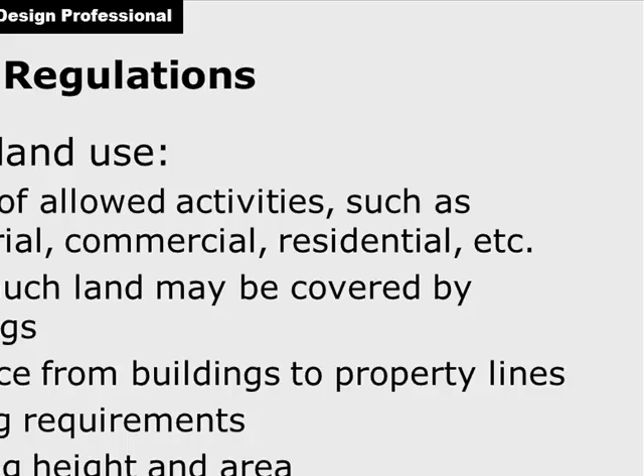So that's what zoning regulations are. They'll also tell you how far you have to be from the building, etc., from the street line. You have to have right-of-ways, because usually within like 10 or 15 feet of the curb, there's utilities running underground, or it may be in the back, like in an alleyway, and you can't build on top of those, or else if something happens, they can't get to them to fix it.

Building codes are what regulate the design of the building itself. You have to deal with fire safety, emergency egress, construction quality, structural integrity, durability, and livability. All of that is within the building code, and I don't know if we have one here. We need to get one if we don't have one. But in Corpus, we use the IBC 2009 version.

I don't see one here. I have one at home, so I'll probably bring it up here, but until we can buy one - basically, it's about that thick, and it's lovely reading. But it's divided up into sections, and I think there's some sections in the slides that you may have seen, and we're going to do a little exercise on it, so you can understand how to look through things.

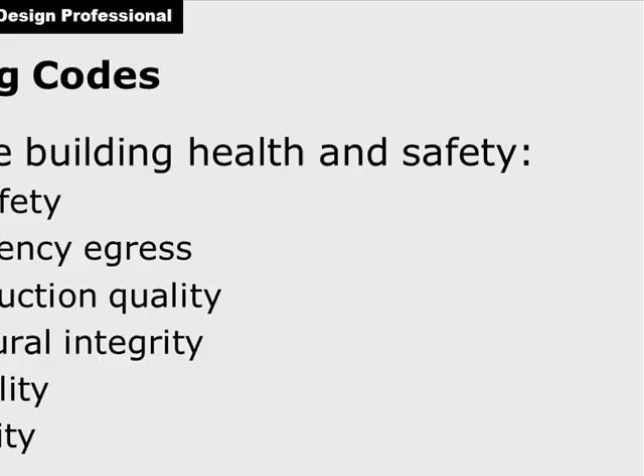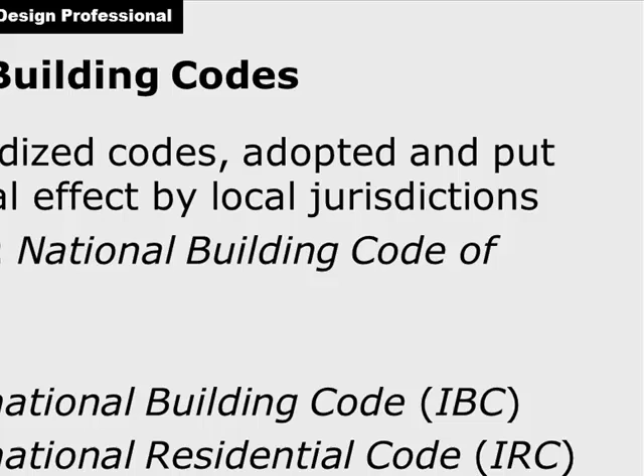More issues that the building code covers. It talks about the IBC, that's what we use here, and the IRC. They're all made by the same people. They have a monopoly.

One thing you need to know, basic information on your building, is the activity within it. A is for assembly. This building has a lot of assembly spaces. It's not educational because it's higher education - it would be educational if it was 12th grade and under, but it's just an assembly building because we're mostly adults and we just assemble.

Business, obviously, is business building. This building also has part business in it. Factory is obvious. High hazard would be some place where they store flammables or they work with flammables. A welding plant is probably a high hazard thing. You have to build accordingly.

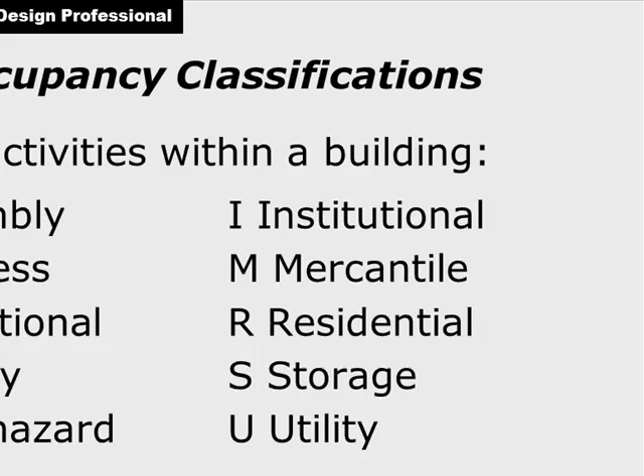Institutional is jails or mental hospitals or stuff like that. Mercantile is stores, residential storage, and utility. So those are the different buildings, and it talks a little bit about those. You can read that on your own.

Then you get into construction types, which you have to choose, and that is based on the size of the building, whether you're going to have sprinklers in it. Sprinklers let you have a bigger building because it's all about getting out in case of a fire. And if the sprinklers start, then you have a longer time to get out, so you can have a bigger building.

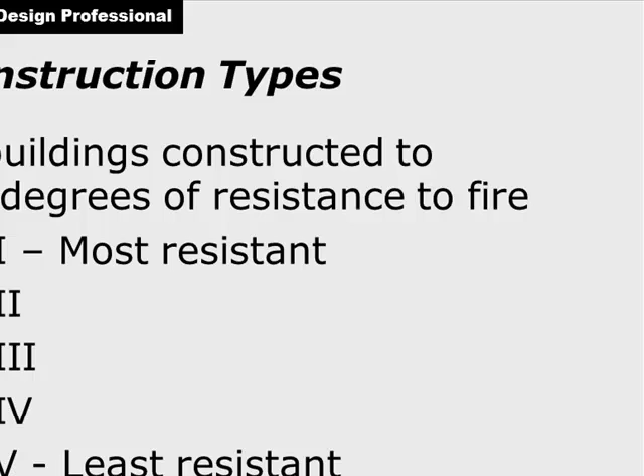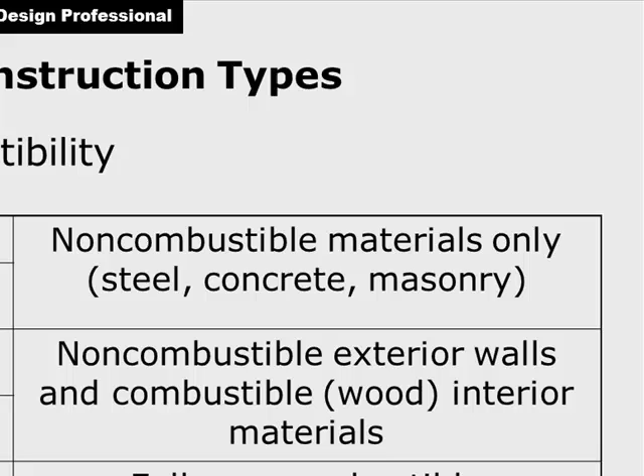Most resistant to fire is type 1, least resistant is type 5. Most commercial type buildings are type 2 construction, which is like steel studs and gypsum wallboard, I believe - non-combustible materials, steel, concrete, masonry. Type 3 might have wood 2x4 studs in your partitions. Type 5 is fully combustible.

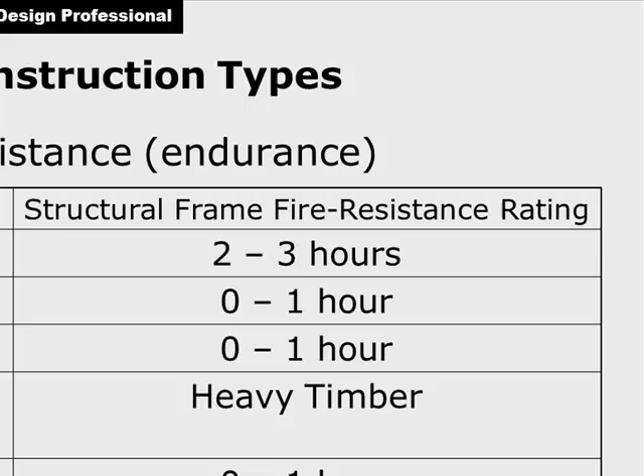And that's how long the frame resistance lasts. Type 1 has to stay standing for 2 to 3 hours, has to give you 2 to 3 hours before the whole thing's collapsed. Type 2, you got 1 hour, but with sprinklers it would be longer. Type 3 is 0 to 1 hours. Type 4 is heavy timber, which is fire resistant - we'll learn about that later. Type 5 is 0 to 1 hour.

Here's some of the, talks about the different fire resistance. You can study that, and I think we might have to look at it when we do our exercise.

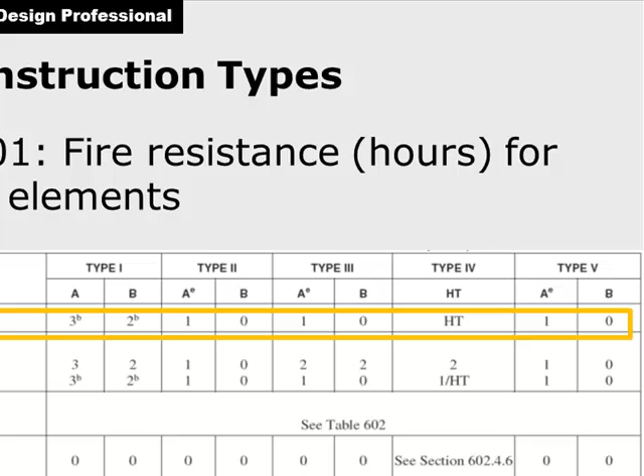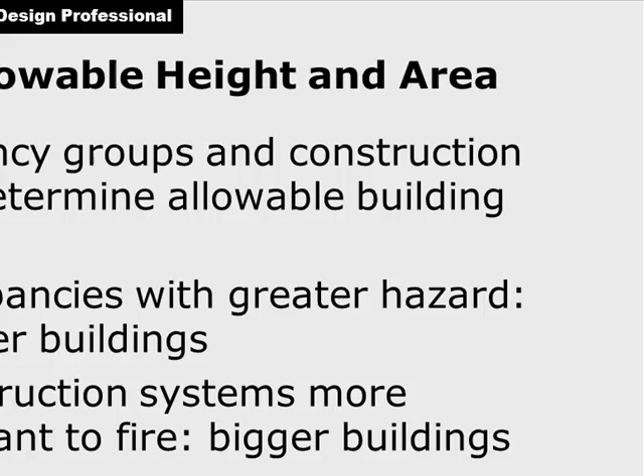Based on your usage of the building is how high it can be and how big it can be. And it varies - if you're going to spend the money to put sprinklers in your building, you can have a taller, bigger building.

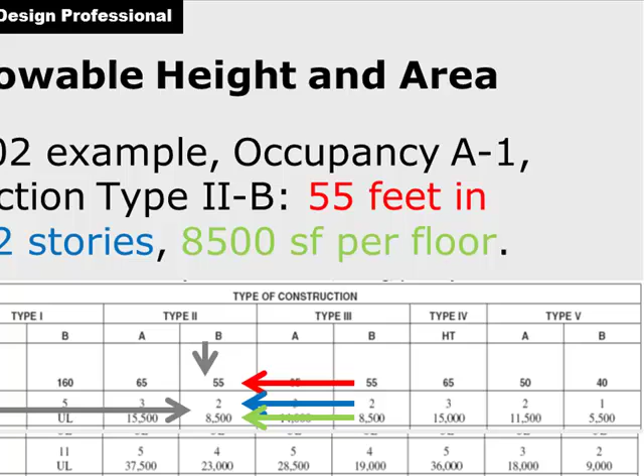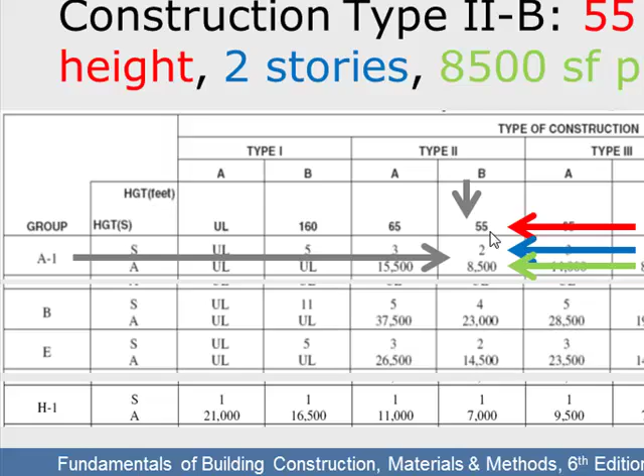What they're saying here is a type A1, assembly 1, construction type 2B can be 55 feet tall. There's the type 2B, and it's in the A1 group, so it can be 55 feet tall. It can be 2 stories, no more than 2 stories tall, and it can have 8,500 square feet per floor. So that's a common table that we use a lot.

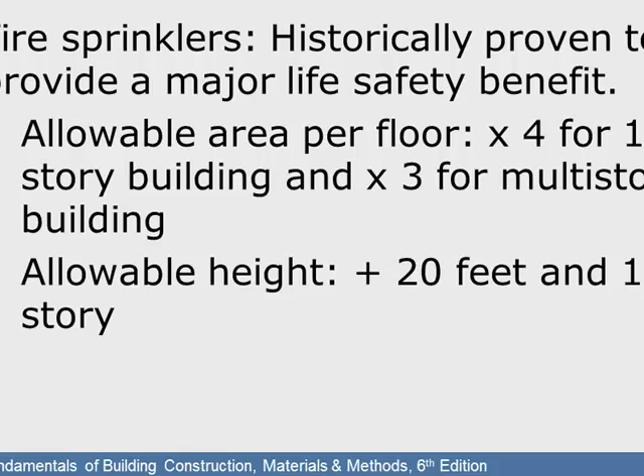We talk about specifications, or specs for short, a lot. Did I tell this class about how thick specs are? I forget. Well, basically, specifications are like the Bible that go with your drawings. They're a legal document issued by the architects and engineers, and they cover everything in written format as required.

So there'll be a specification on gypsum wallboard, and it'll say it has to be 5/8 inch thick type X because that's fire resistive, and it can only be made by these manufacturers. So the contractor looks that up, and then he knows he can only go to these places to get his gypsum wallboard. And there'll be specifications for these countertops.

And all of this is divided into sections, and I think it shows that. Yep, right there. So you've got all these divisions, and within that you have all the different elements of your building. Division 0 is the legal documents, contracts, and how they're going to go about bidding and stuff like that. General requirements is stuff that happens at every construction site. You know, they have to have an office, they have to have their own porta potty, they have to fence off the area, stuff like that.

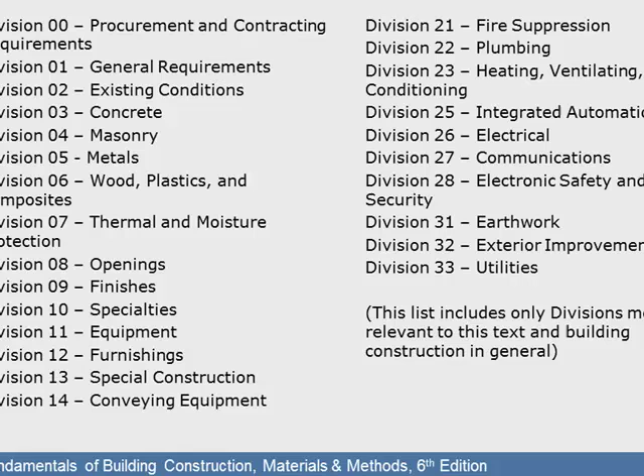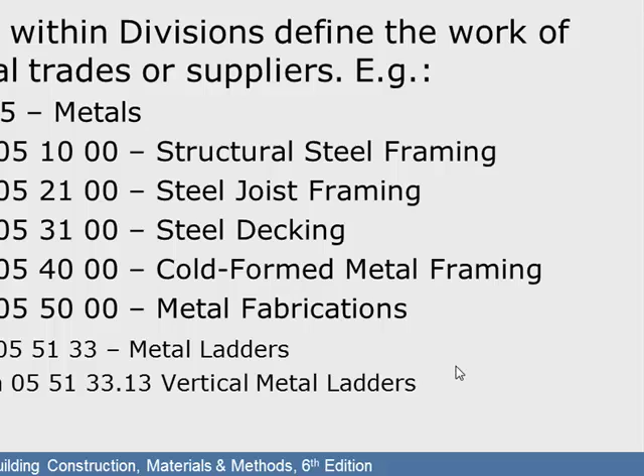Okay, and then the divisions are further broken down like this. You have Division 5, which is metals. Part 10 of that would be steel framing. Part 21 would be steel joist framing, and so forth. There's a zillion of those, but that just keeps it organized. And they even have programs now where it builds it for you and makes all that legal mumbo jumbo.

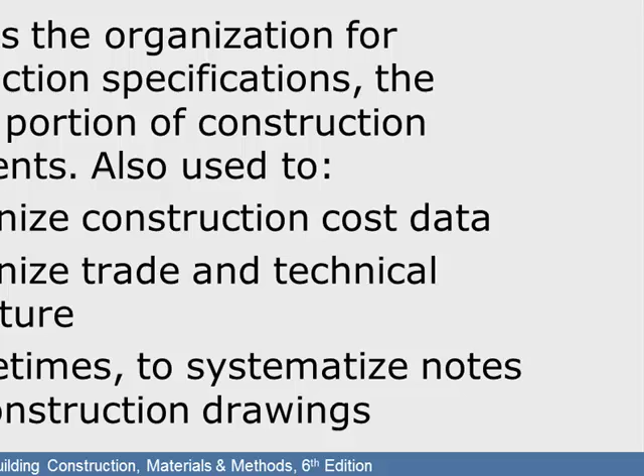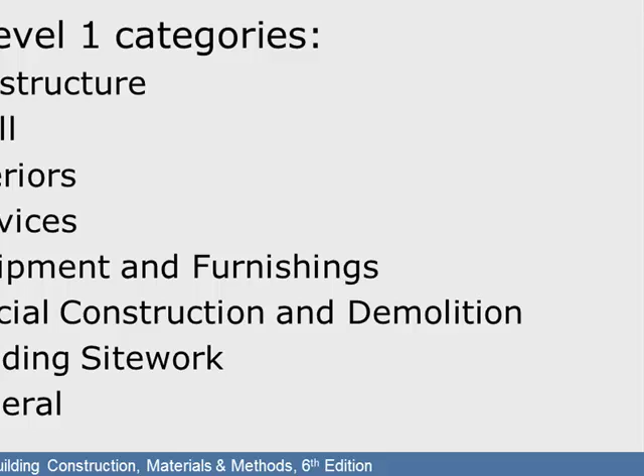There's other ways to do it, but the most common way is the CSI format. That's what most architects in the United States use.

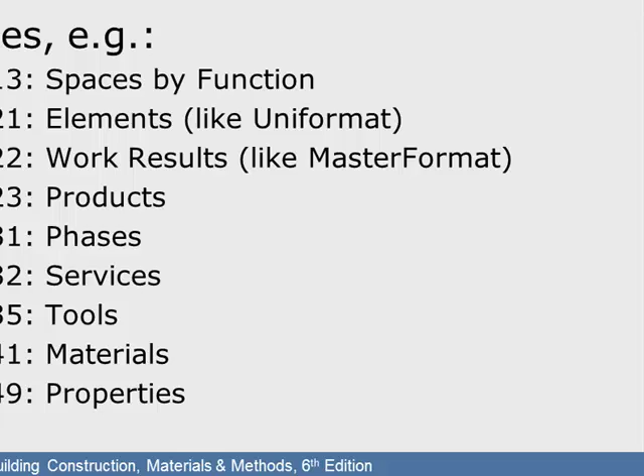So the contractor is the construction professional. He's the one that builds it, obviously. The design team usually consists of architects, engineers, and other consultants. The construction team is the general contractor and his subcontractors and suppliers. The general contractor is kind of like the architect of the design team. He organizes and hires subcontractors because you can't possibly keep all the specialties you need on staff. You can't have an electrician, a plumber, a concrete pourer, a framer, and all those people. Sometimes if they do a lot of a certain thing, they may have someone like that, but in general they have to sub it out.

But they have ones they usually use and they're very familiar with. And then you got the owner who finances it and has a lot to say about it. So there's different ways that you can organize this.

The most traditional way is like this. In the past, the owner would usually go and hire an architect. The architect would hire the engineers, shown here as sub-consultants. They would create the design and all the construction documents.

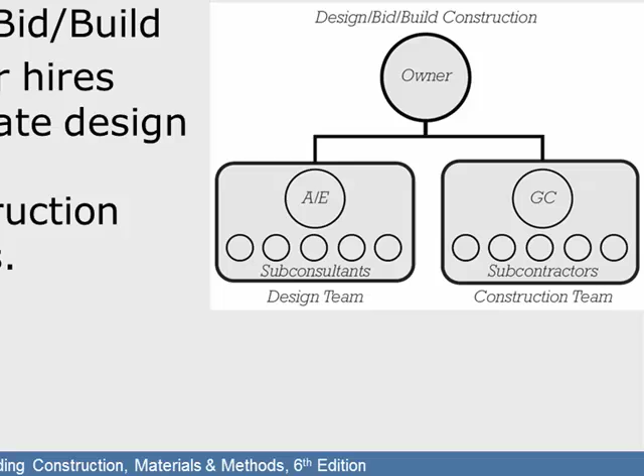Then it would go out to bid. The architect, in the old days, would help the owner put it out to bid and select a general contractor, not necessarily the cheapest, but the best value, using all kinds of parameters to choose. Price is a big factor, but you want to make sure you're getting something worthy. Then the architect would work through construction with the general contractor, usually having meetings once a week, visiting the site, and approving shop drawings and things like that. So design, bid, build is the most traditional way.

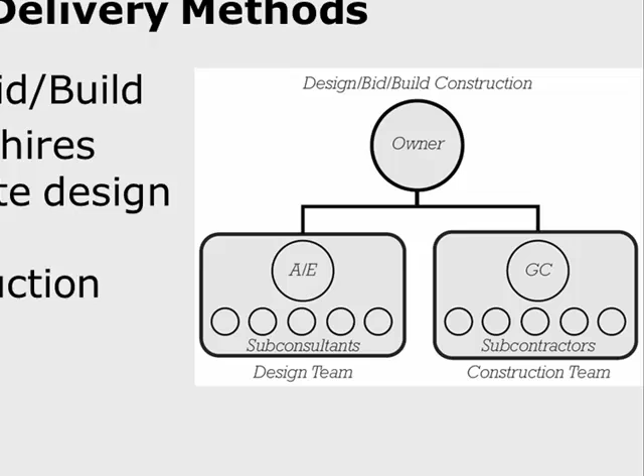This gives you more detail about that. Design-build usually is where the architect and the general contractor are in the same company, and that's becoming more and more popular because it's all in-house. It saves time because if the architect always works with that general contractor, or vice versa, they know each other's business and are a little bit more efficient.

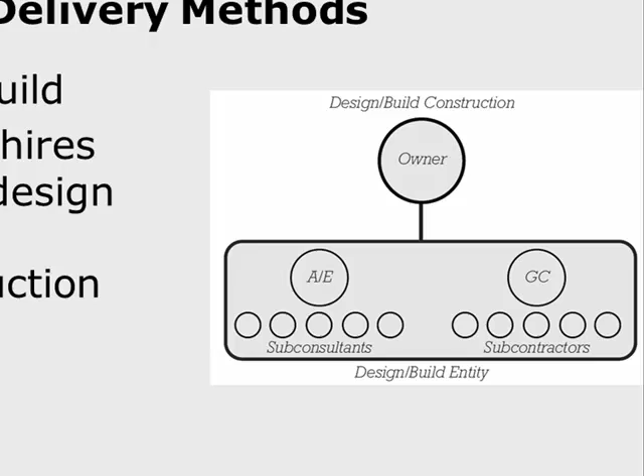The bad part about that is there's no checks and balances as much, because they're so familiar with each other and they of course want to give each other all the business. So they're more likely to just say, yeah, that's fine, even when there might be a better way. But it gives you, usually, the ability to produce the product faster that way.

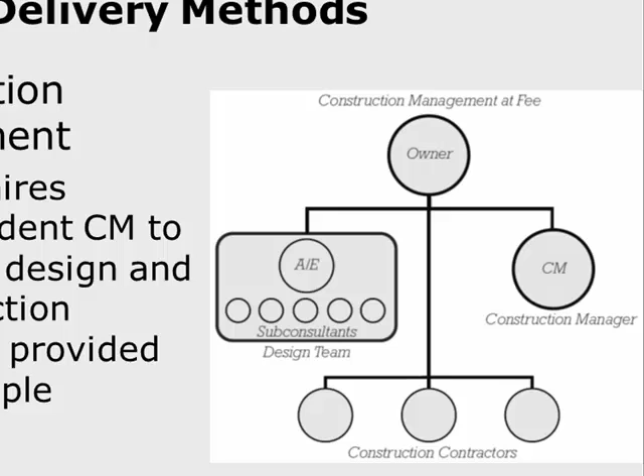Construction management is another way, where the owner hires an independent person, a construction manager, to oversee the whole thing from start to finish. He'll oversee the architect and all the subcontractors, and he'll oversee the construction and do the bidding and stuff like that. So he or she, it could be a she.

Within that, you've got CM at risk, which means construction management at risk. The construction manager gives the owner a flat fee, say $100,000, to do this, and it's in the construction manager's benefit to make it as efficient as possible, because he gets whatever's left over. If it only costs $75,000, he'll get $25,000. So that can be good and bad. You want it to be efficient, and the owner knows what he's spending.

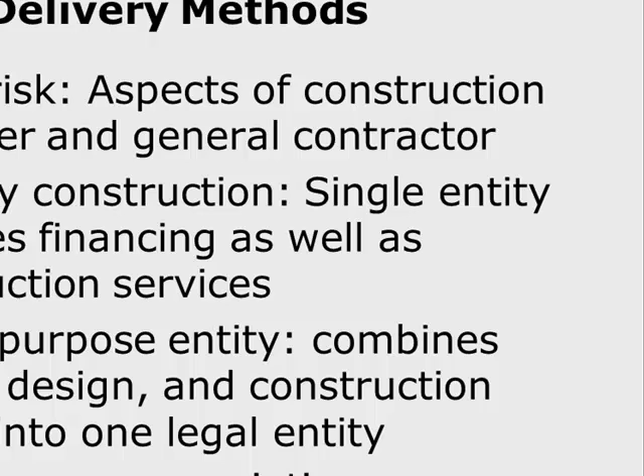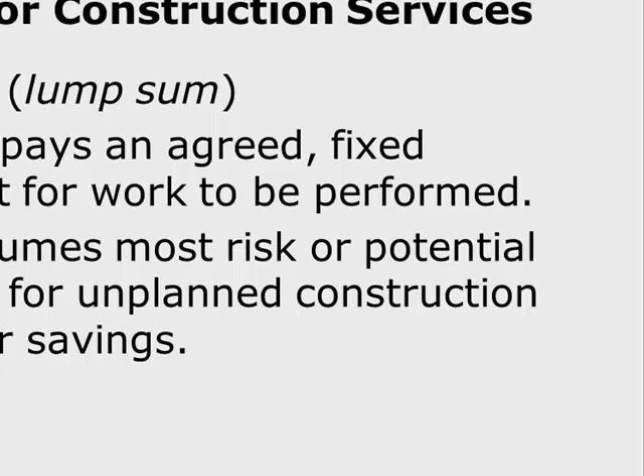With fixed fee, the owner pays an agreed fixed fee, like the construction manager's fee would be $20,000 to manage the whole thing, but then the owner pays whatever it costs to build it, so if it goes over, the owner goes over. With construction manager at risk, if it goes over, it comes out of the construction manager's pocket. The owner never pays more than the original amount, unless they come to a new agreement.

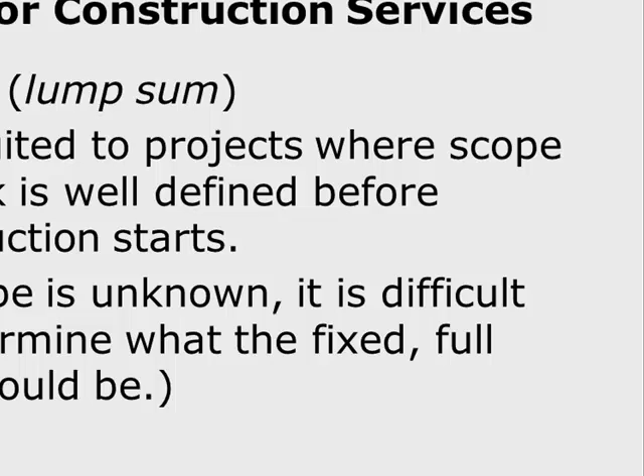That was the case, and how would they be making any money? They're experienced bidders, they know how to do it, but if you want to try to get in the door with somebody, you might give them a lowball bid, and then maybe later you'll get a job that's profitable, you'd hope. I guess you gotta spend money to make money. Yeah, sometimes, especially in the beginning when you're trying to get known or something like that.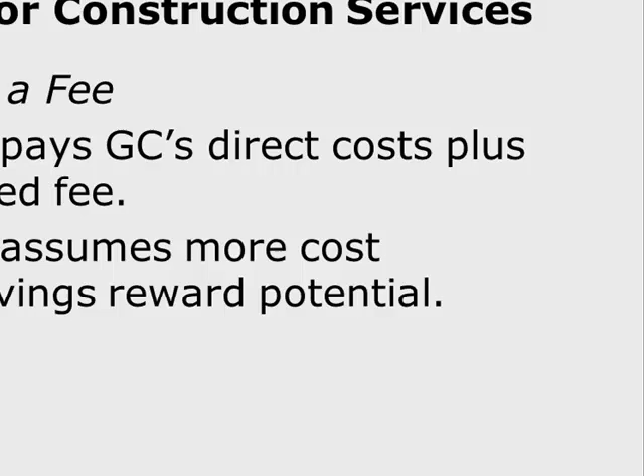Cost plus a fee, I already went over that. Y'all can read the rest, it's in the PowerPoint.

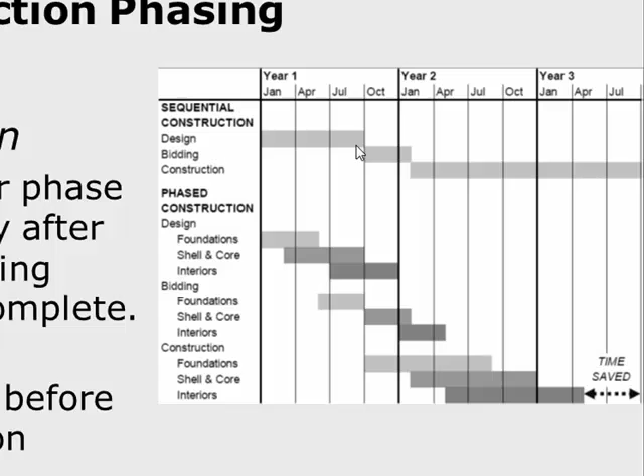Different ways to schedule your project. Sequential construction: each major phase begins only after the preceding phase is complete, so you can't do B before you do A. That's a more traditional way to do it. As you can see on the top part of this chart, you finish this, then you'll start that, and then you'll start that next one. If you have phased construction, you can overlap different things and save a little bit of time.

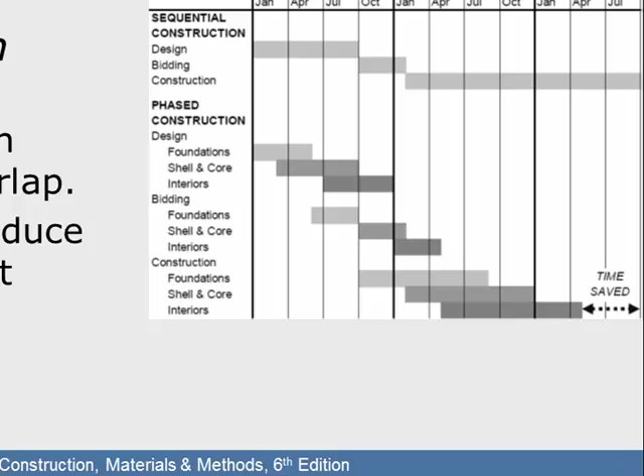There was another one that talks more about that. The Gantt chart is something that's commonly used in construction scheduling. Are any of y'all in that class? Construction scheduling class - I don't teach it, but they'll go over all of this in detail. The Gantt chart is a common way that's used to record what's going on and predict the timeline.

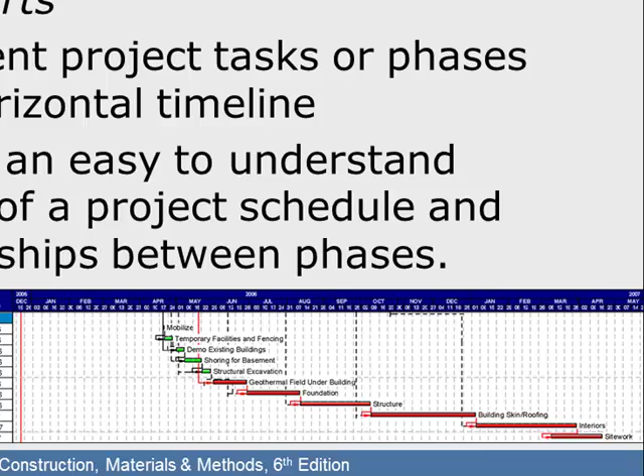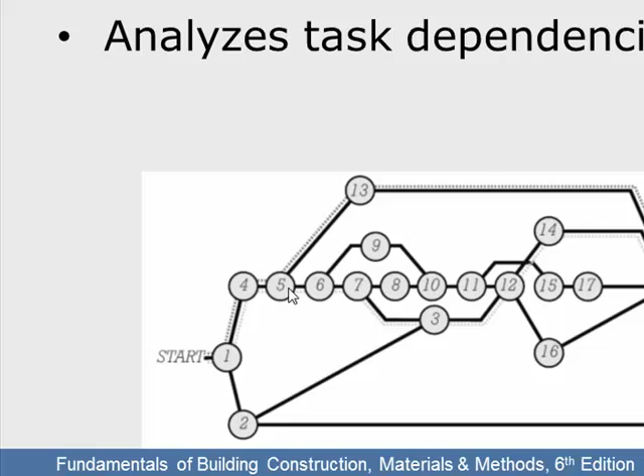In step 4, you can keep marching on down here, but when you're done with 5, you can also do 13. When you're done with 2, you can jump over to 3. So it's a way to mix it all up. You have to do certain things in order, but you can also jump ahead and do something, and it squeezes the time down in the end. But you have to have a good scheduler to know how to do that.

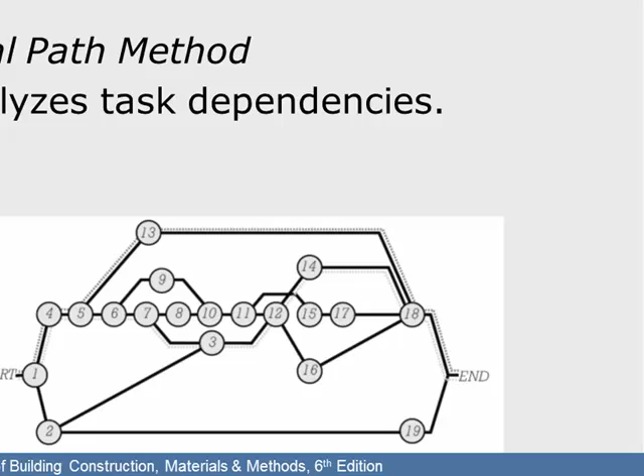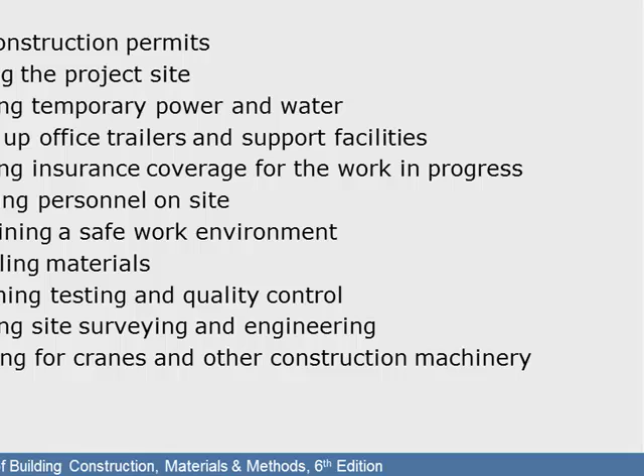This talks about the general contractor, what they do. I don't need to read that to you.

Okay, that's the end of that. Now what I like to do is these worksheets, and you can work together on them. I'll pass them out and we'll read through it. If we don't finish it in class, then it's due at the beginning of the next class. But if you get done today, you can turn it in. Everybody can work together, but you need to fill out your own sheet.

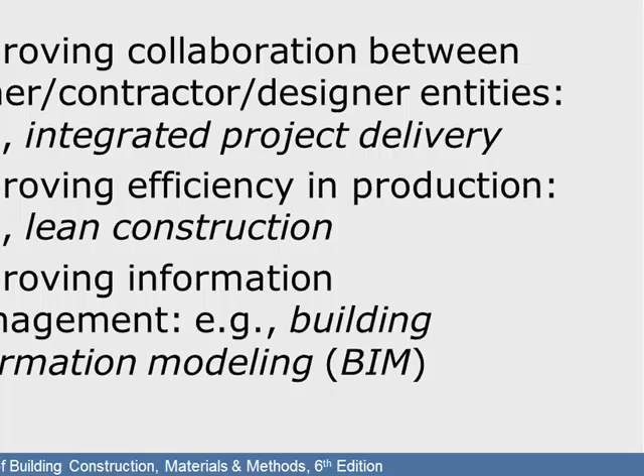Okay, so what this says—before I start, I want to note that I did make one change. If you keep up with me on the Canvas calendar, at first I was going to do a test from chapter 1 to 3, but I changed that. We're just going to have a test on chapter 1 and 2, because I was looking through chapter 2 and it's just too long. And we have a holiday Monday, so the first test is going to be, let me see...

Not next Wednesday, because today is the 15th, so then we'll go over chapter 2 next Wednesday. And then the test is going to be on the 27th, and I'm doing that because that's the day I have jury duty. So y'all don't have to come to school—you can take the test on Canvas, but it still counts as class time. So hopefully I won't get chosen and I'll be back Wednesday. Although I've never been chosen, and it would be fun, but not when you have a lot to do.

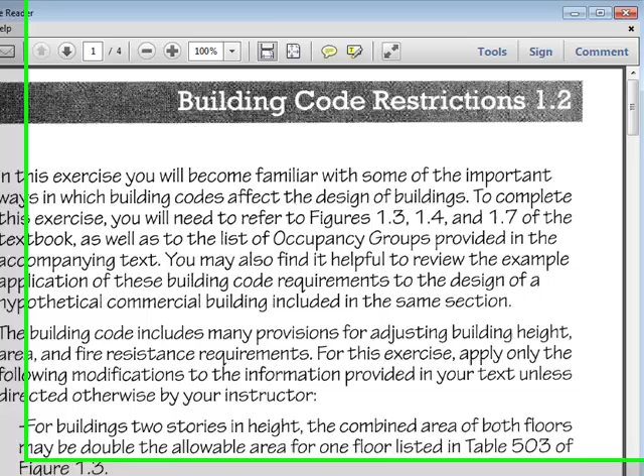Anyway, so back to this. Let me see if I can pull this up here. Since I'm recording this screen, I want people to see what I'm saying.

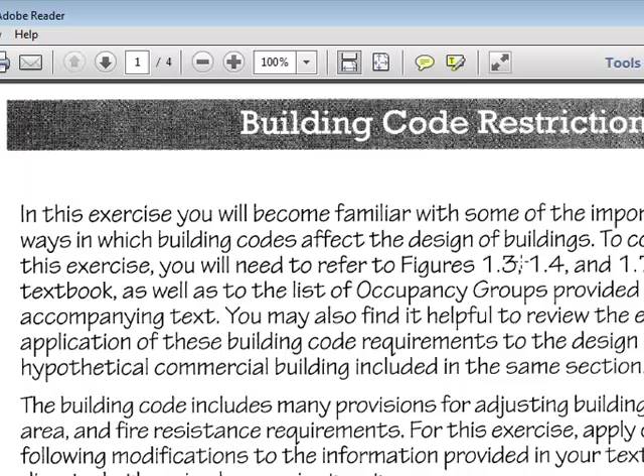In this exercise, you'll become familiar with the important ways in which building codes affect design of buildings. To complete this exercise, you will need to refer to figures 1.3, 1.4, and 1.7 of the textbook, as well as the list of occupancy code groups provided in the accompanying text.

Is that in here? Oh well, I'll keep reading and we'll see if we need it. You may also find it helpful to review the example application of these building code requirements to the design of a hypothetical commercial building included in the same section.

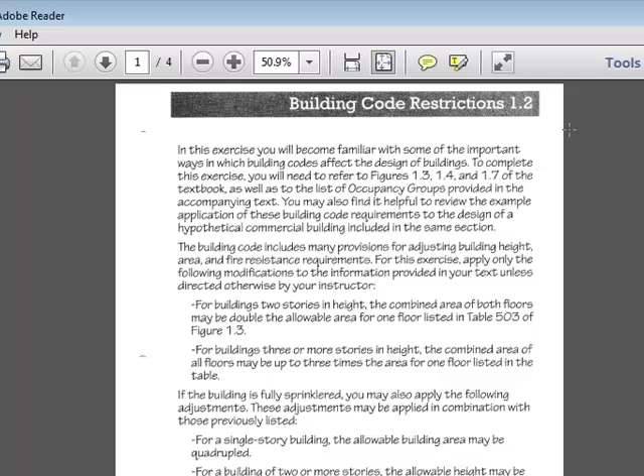The building code includes many provisions for adjusting building height, area, and fire resistance requirements. For this exercise, apply only the following modifications to the information provided in your text—the textbook—unless otherwise directed by your instructor.

For buildings 2 stories in height, the combined area of both floors may be double the allowable area for the floor listed in Table 503, and may be double the allowable area of one floor listed in Table 503 of Figure 1.3. For buildings 3 or more stories in height, the combined area of all floors may be up to 3 times the area for the floor listed in the table.

If the building is fully sprinklered, you may also apply the following adjustments. These adjustments may be applied in combination with those previously listed. For a single-story building, the allowable building area may be quadrupled—that means times 4. For a building of 2 or more stories, the allowable height may be increased by 1 story and 20 feet, and the allowable area may be tripled. This probably will make sense once you start in on this.

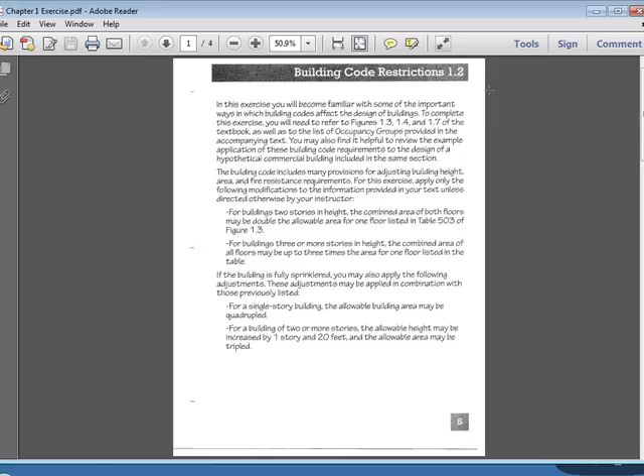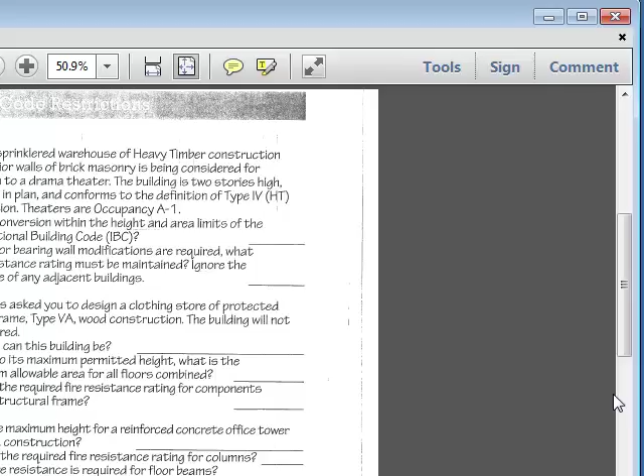Okay, so let's see. The first one is an old, unsprinklered warehouse of heavy timber construction with exterior walls of masonry brick being considered for conversion to a drama theater. The building is 2 stories high, 80 feet by 70 feet in plan, and conforms to the definition of Type 4 heavy timber construction. Theaters are occupancy A1, meaning they're an assembly. So question 1: is this conversion within the height and area limits of the International Building Code? So let's see.

Okay, you need to refer to your figure 1.3. I'm going to go through the first one and then y'all can do the others. So you refer to figure 1.3, IBC table 503 in the text, so we got to find that. 13? Thank you.

Is the conversion within the height and area? So it can be 2 stories high, and 11,500 square feet per story. Is that what y'all got? Say that again?

In the table it says occupancy group A1, construction type 4, unsprinklered buildings may be up to 65 feet and 3 stories in height. Oh, 4, I was looking at 5, sorry. Okay, so it can be 3 stories high and 15,000 square feet per floor.

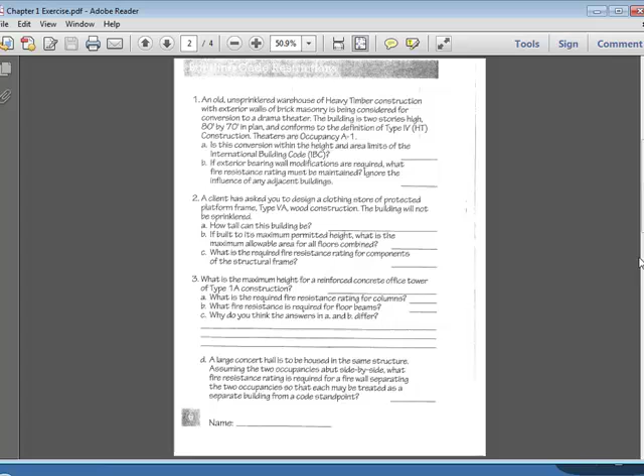So y'all work for a few minutes together and see if you can figure out the rest of those. In a few minutes I will come around. Okay, pause recording. Trying to use a starboard, so bear with me because that records what I'm doing for the online class, but it doesn't do my handwriting very well.

So we already answered number 1. And then number 2, what did anybody get there? 2 out? You mean B or 2? That was for 1B. Yeah, I meant question number 2. We already answered number 1 in the beginning.

For 2A, it's 50 feet. Does everybody agree with that? I do. Okay, see if I can write that on here. 50 feet. And then what about part B?

11,500 feet. If built to its maximum permitted height, what is the maximum allowable area for all floors combined? What did you say, sorry? 11,500 feet, is that right? Table, I don't think so.

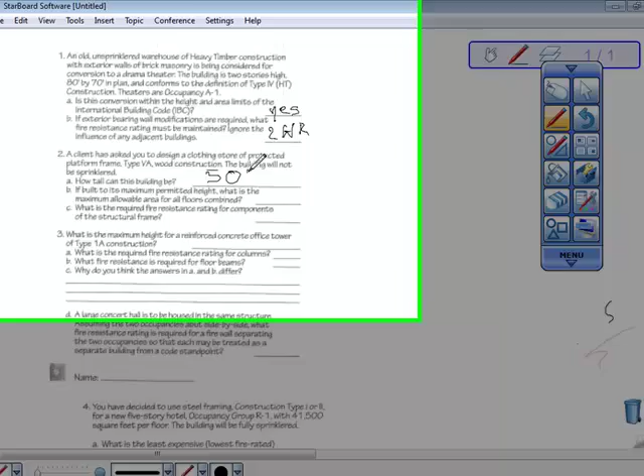So the question was, I can't read that one, I have to read this one. What's the maximum permitted height for all floors combined? 34,500? I'm sorry, trying to, number 2A.

A client has asked you to design a clothing store, protected platform frame type 5A wood construction. The building will not be sprinklered. How tall can this building be? 50 feet or 3 stories? That's correct. Okay, if built to its maximum permitted height, which is 3 stories or 50 feet, what is the maximum allowable area for the floors combined?

What? 42,000? That's right. And how did you get it? I went to Mercantile and I got the total area of the floor, which is 14,000, and then multiplied it by 3 stories. You went to, what page are you on?

I guess it'd be, I don't know what page it is, I'm on the online one. Oh, okay, what table is it? 601? It's the one with the first table. Yes, the first one. Oh, you went to Mercantile, I see what you did. Okay, type 5, yes, 14,000, 3 stories, and you said 42,000, right? So that's correct. How did we get that again?

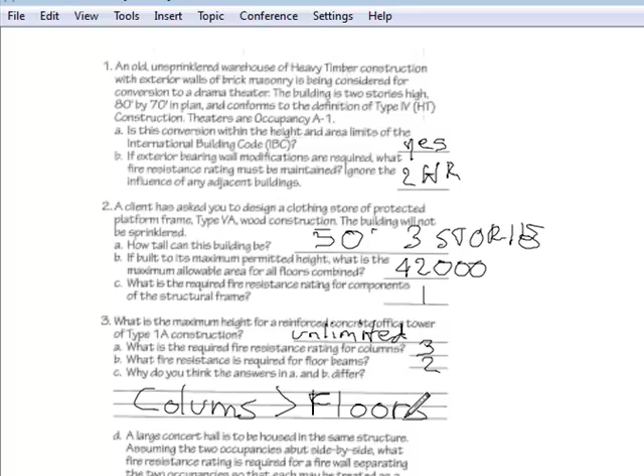Because columns rock. Okay, now we're on D. A large concert hall is to be housed in the same structure. Assuming the 2 occupancies abut side by side, what fire resistance rating is required for a firewall separating the 2 occupancies so that each may be treated as a separate building from the code standpoint?

Trick question. Anybody get it? So, one? You put 1? Nope, I put a sad face. You've got to go to a different table.

It's table 706 on figure 1.7, that's on page 16. So if you look at that table, you have different occupancies — type A and type B, which is what we're dealing with. It says the firewall resistance rating between those two has to be a 3.

Does everybody see that? Okay, they gave us the group — group A and group B — in figure 1.7, which is table 706, called firewall resistive ratings. So the difference, to separate an A and a B, you need a 3-hour wall. Right?

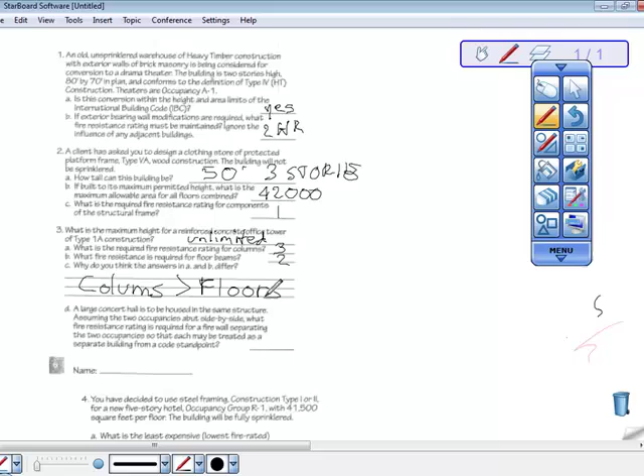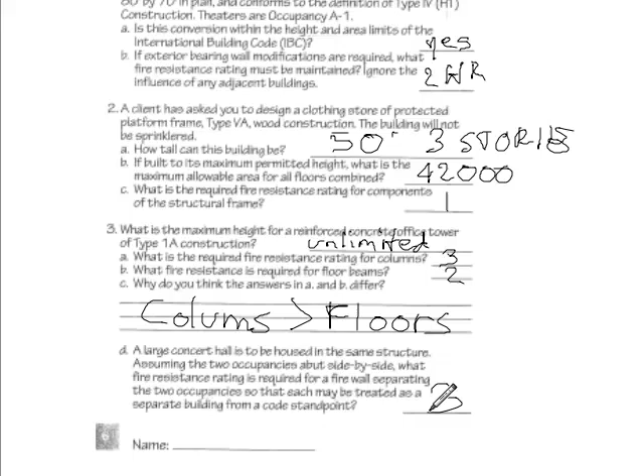Well, one's 3A and one's just a 3. What's the difference in that table? Oh, it's 1.7. In which table? Table 706.4, figure 1.7. Oh, I see — well, that's a little subtext. For A in type 2 or 5 construction, walls shall be permitted to have a 2-hour fire resistance. So that's an exception, that's what that means.

All right, now we're on to number 4. You have decided to use steel frame construction type 1 or 2 for a new 5-story hotel, occupancy group R-1, with 41,500 square feet per floor. The building will be fully sprinklered. So question A: what is the least expensive, lowest fire-rated construction type you are permitted to use?

I got my pages mixed up here. 1, 2, 3.

I'm gonna go out on a limb and say 3A. 3A? Nope. Anybody else want to guess? 2B? Nope. 1B? Combine what y'all just said. 3B? No, no, no. What did you say? 4B? No, what did you say first? 1A? Yeah, and you said 2B. It's 2A.

So this is the exception? Well, how do you figure that out? Okay, let's see, what is the least expensive?

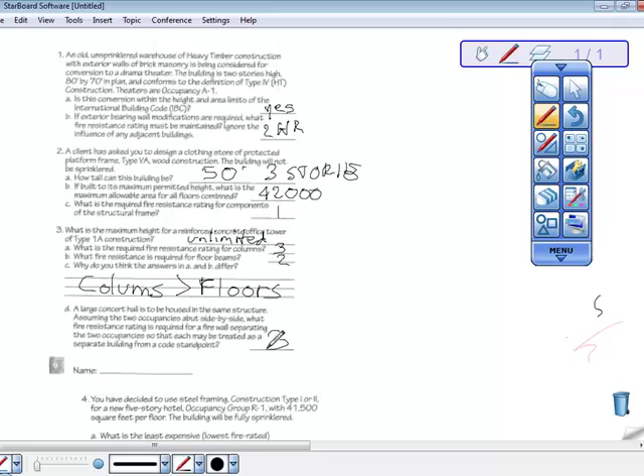So you just take all that, form a matrix, and put it all together. You probably had to have an hour to do that one, so I won't count it against you. But the answer was 2A.

For 4A is 2A. Yes. So I don't know if we have time to... let me see. Anybody do any other questions? Or is that about as far as you got? That's as far as you got? What did you get on the others?

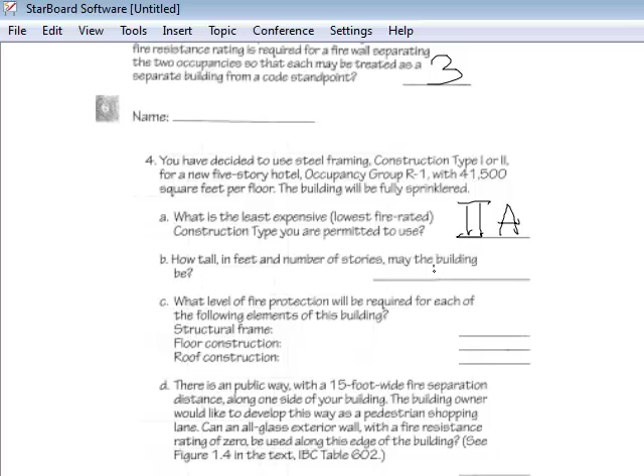5 stories, 75 feet, but it's different now—it should be 85 feet. Okay, but the answer is 5 stories, 85 feet. So that's right.

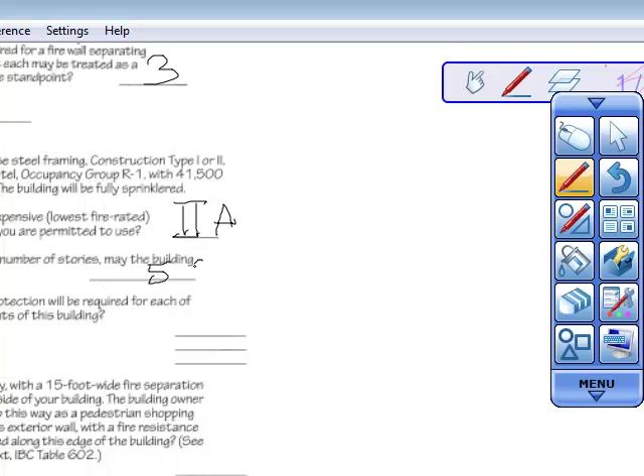Can't really read what I wrote there, but okay. And C, did you do that one? Anybody do 4C? They're all one—they're all 1, that's correct. C, the answers are all 1 hour.

And D, anybody do D? No. Correct. What? No.

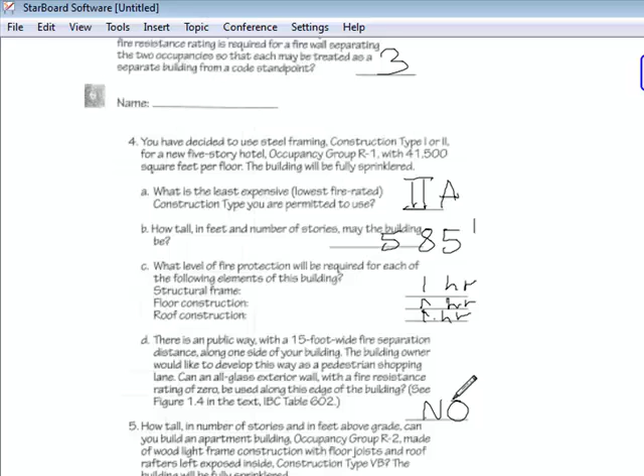And anybody get to number 5? We got 3 stories and 60 feet. Excellent. Everybody agree with him? Why not? No, I didn't say no. I said, why? I didn't hear you. I said, okay, why not? Why wouldn't you agree? Because I said excellent. Okay.

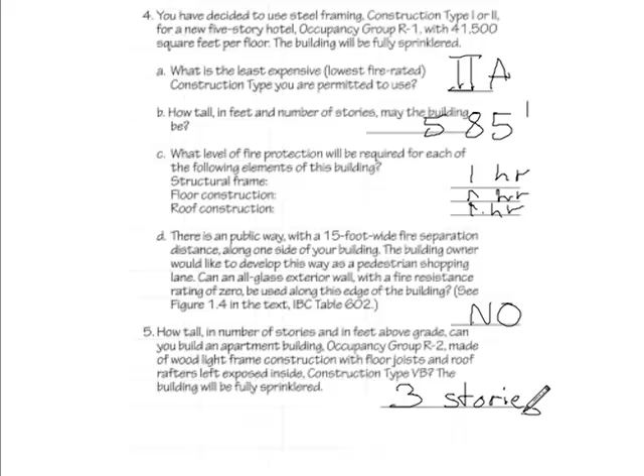Is that all? Is that the end of it? Keep losing my place, where's my paper? There it is. Okay, yes, that's it.

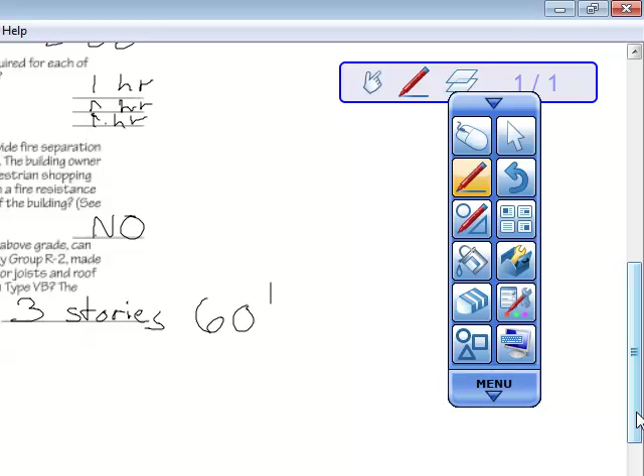But you better, okay. Now this is the problem because I don't know your names. No, you're Raymond, right? Yes. Where's that name? All right, yeah, that one, okay, so I'm just going to put another check there. I'm Ricardo. Ricardo. Okay.